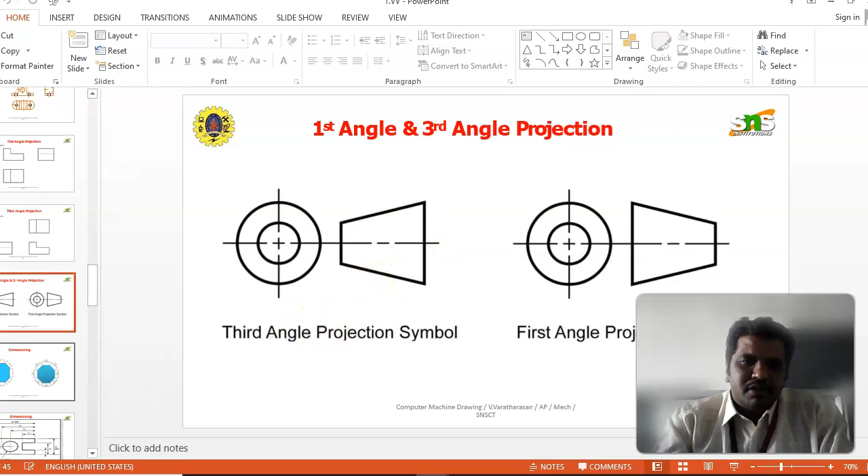Next one is dimensioning. We give so much importance to dimensioning, because not only in industrial drawing but also in the normal manual drawing methodology, dimensioning and lettering are given so much importance, because they give a clear representation in the presentation part. The presentation of the particular drawing will be good and legible. Only then can the observer, say a machinist, identify the dimensions of the particular product.

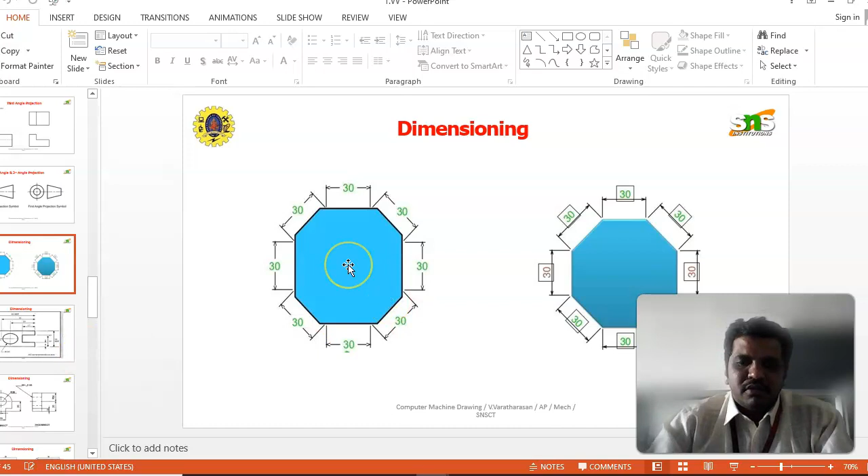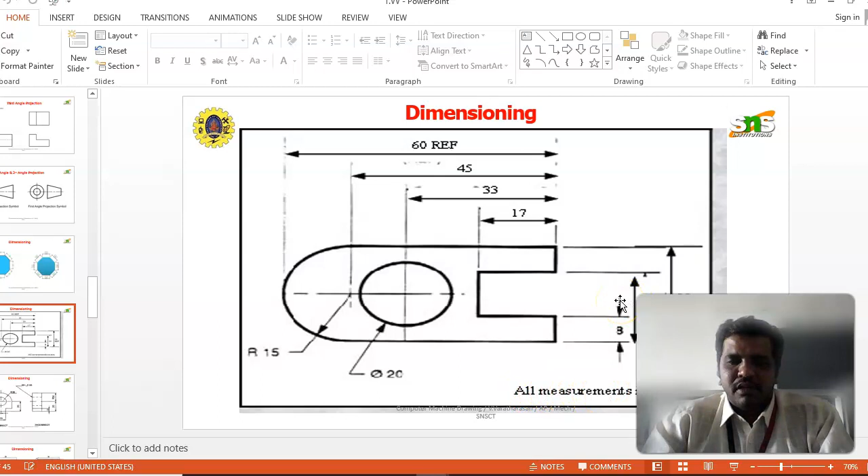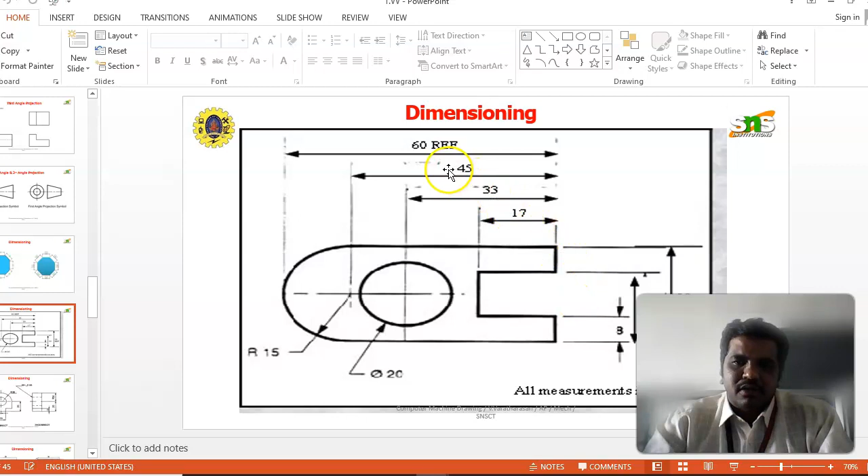This is also dimensioning of a mechanical part. Here they have given a length dimension, the diameter of the circular hole, the radius of the circular hole, and the distance between the slots. These are the width of the particular product. These measurements are given, but in the title block they state that all dimensions are in millimeters. This is a very important terminology we use in the title block. Without stating that all dimensions are in mm, it could be read as centimeters or meters. So a lot of dimension terminologies we are going to use.

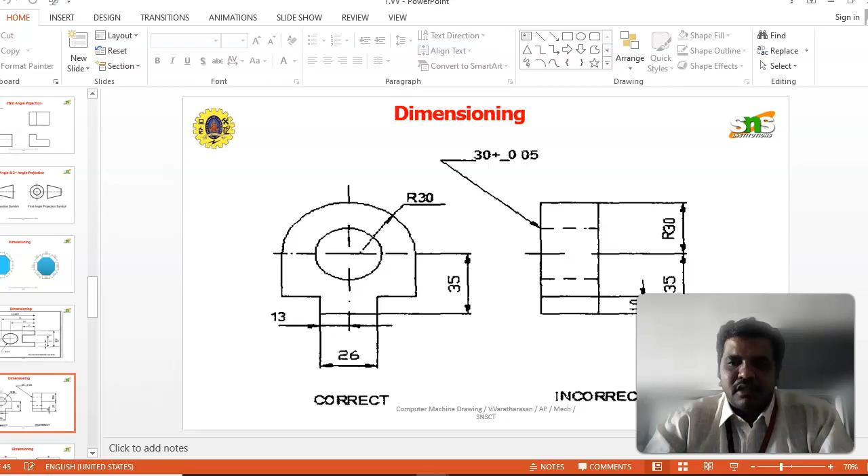Here we are giving the comparison between the correct and incorrect diagram. The left side is the correct diagram, and the right side is the incorrect diagram. In the correct diagram, the symbols and arrowhead symbols are used in a legible manner. The incorrect diagram uses them in a non-legible manner. So that is the thing.

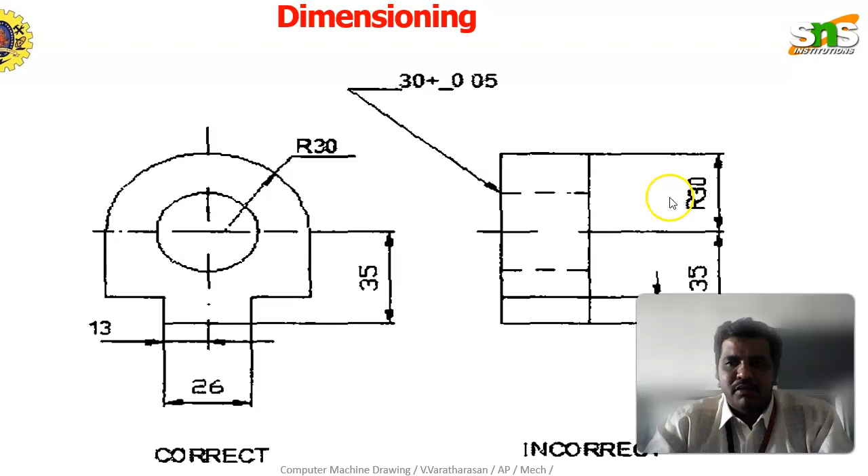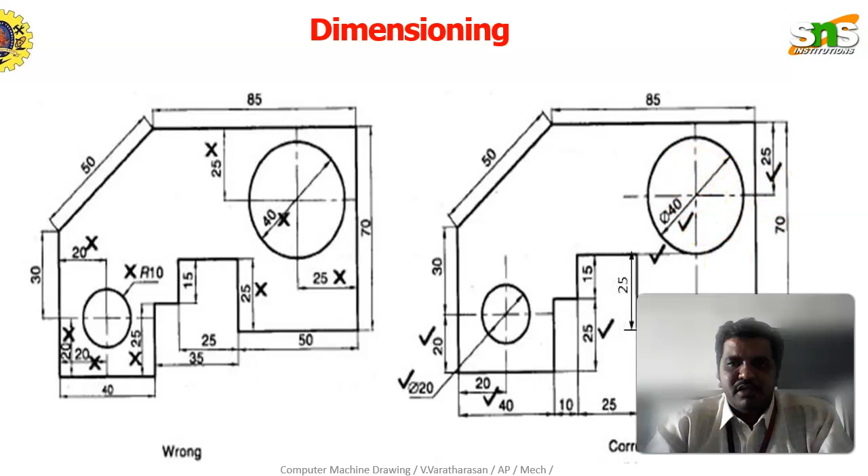So here also the same thing will be happening. The 50 is the measurement of the particular square rod. In the particular square block, there is a circular hole over here. For the circular hole, the dimension of the hole from the center point, that distance also will be given, and the overall length and width measurement also will be

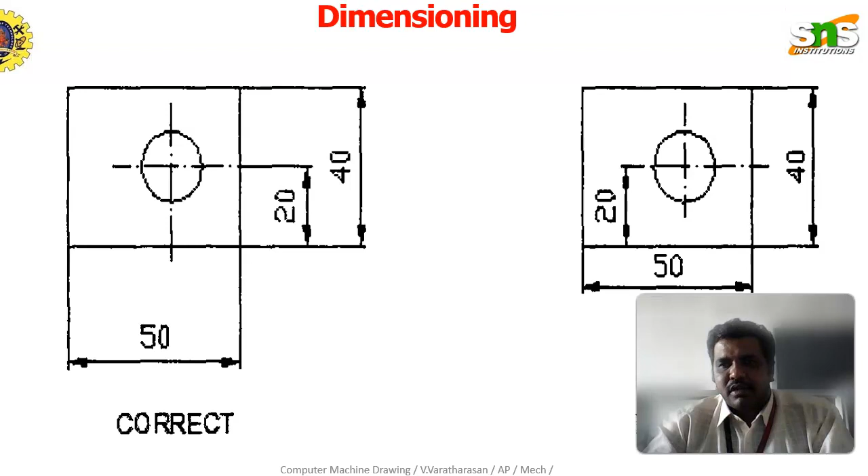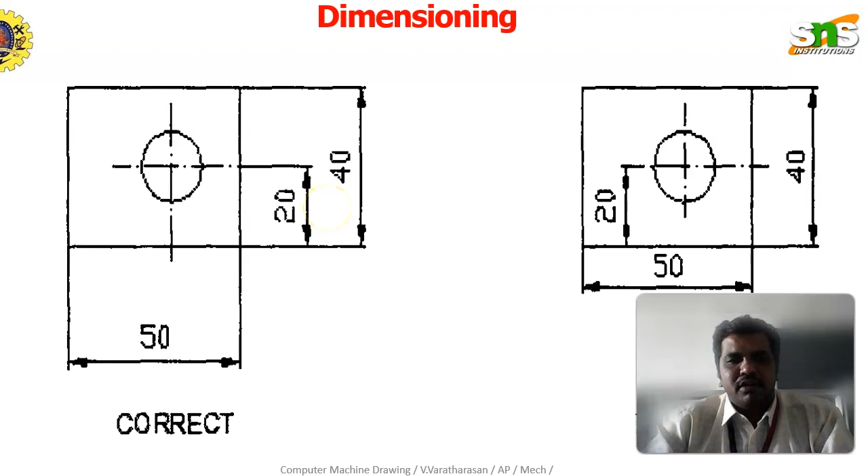given. So in between the dimensions, we must give a proper ratio of gap. Without gap, if we are representing the dimensions over and over, it will not look good, and also it will be an incorrect one. So here is the correct dimension and the incorrect dimension methodology in the diagram representation.

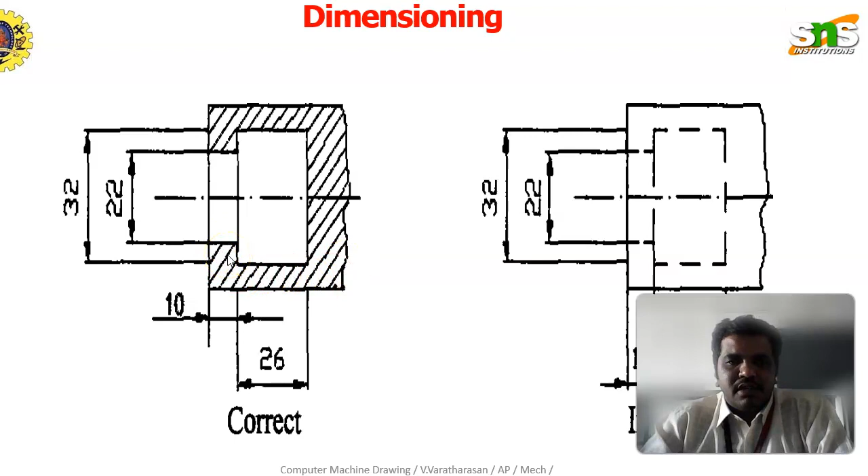So in the slashing line, the cross-cut sectional view, they are representing the sectional lines. These are the sectional lines. 45-degree lines will be shown in the figure now. This section line we always represent in the sectional view of the particular product.

So here the lettering is another important terminology, and it will be an important part of the particular diagram. The lettering should be very legible. If you are using lettering, it should be in a proper format. Both alphabets in capital letters and small case letters and numerals should be given proper space, by using an HB pencil. So that is a very important thing.

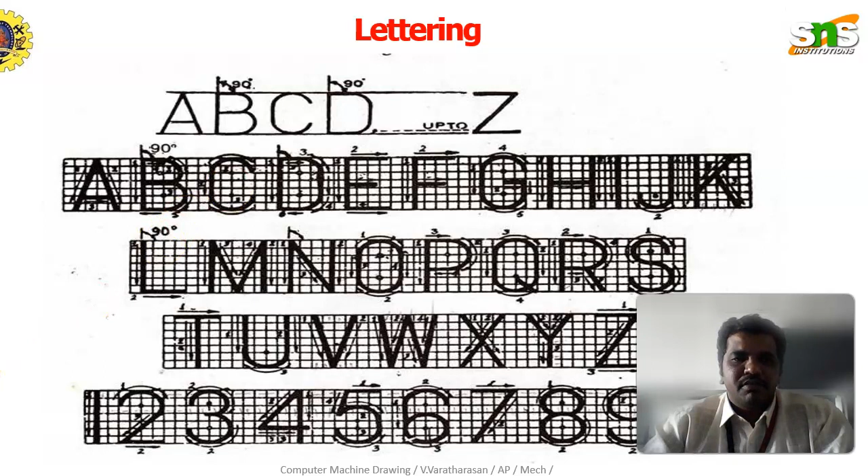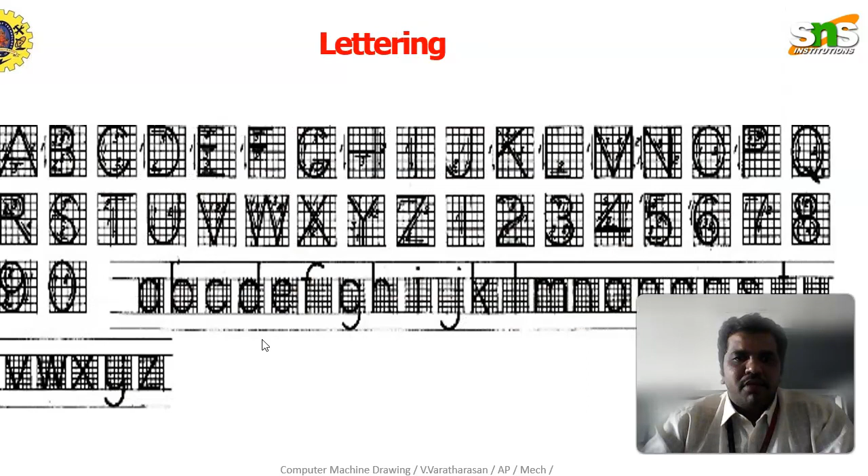Here there are three types of pencil we are using: H pencil, 2H pencil and HB pencil. With the HB pencil itself we use three types of thickness in a single representation, but in the manual drawing method they are using 2H and 3H separately. So these are the proper lettering writing formats given here. The lettering, both the capital and small case letters, is represented in this slide.

If you are going to draw the pentagon plane or lamina sheet, we can't directly draw the pentagonal shape with respect to the base side dimension. So by using the base side dimension and the 108-degree inner angle or 72-degree external angle, take the angle of representation. On the angled line, we can measure the particular baseline length. Then by using a compass or divider, we can represent the particular measurement in the pentagonal shape.